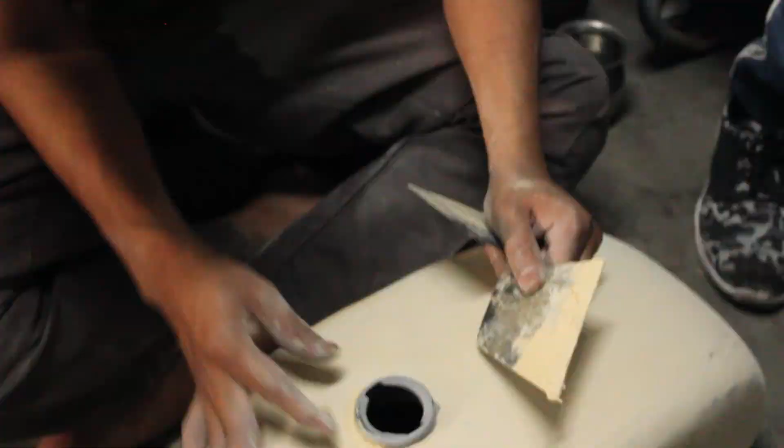Alright, so the paint procedure is not as straightforward as it seems. It actually involves various steps which need to be followed very carefully. Also, this is where most beginners doing a custom build mess their bike up. The paint job is the one thing people notice the most on a motorcycle, and if that isn't done nicely, no matter how cool your design is, your motorcycle will never receive the praise it deserves.

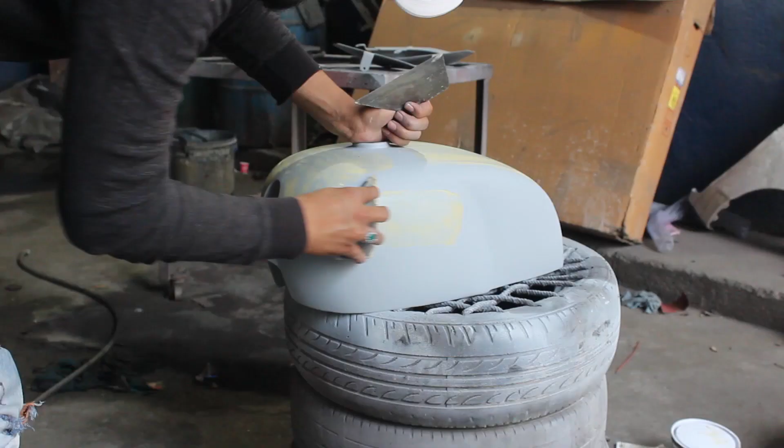So it is better to leave it up to a professional until you understand and master the process, which is exactly what I did as well. So the whole process involves firstly covering up the parts in a primer layer. After this, the part is covered up with putty to fill all the minor gaps and to create a smooth, uniform surface. This step is quite a crucial one because you need to be highly satisfied with the output before painting it up. Also, the edges and curves of the parts need to be kept intact during the whole process.

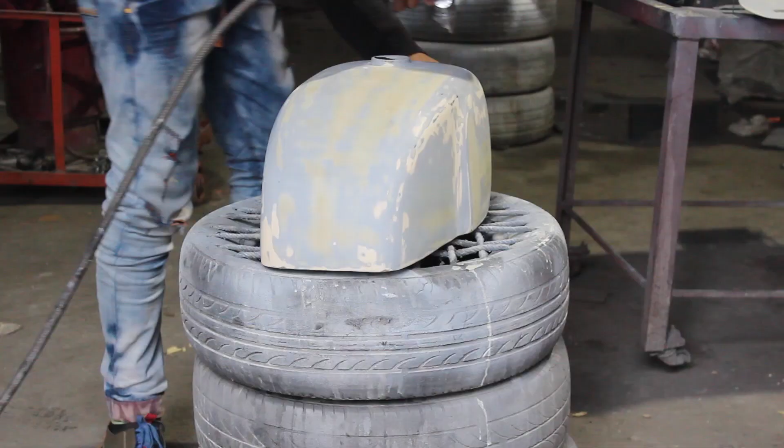Once the putty is complete, another layer of a finer putty called check putty is applied to the surface to fill the very fine pores which might not have leveled out previously. Once we were satisfied with the smoothness of the surface, we sprayed another layer of a better and denser primer on the parts and allowed them to dry overnight.

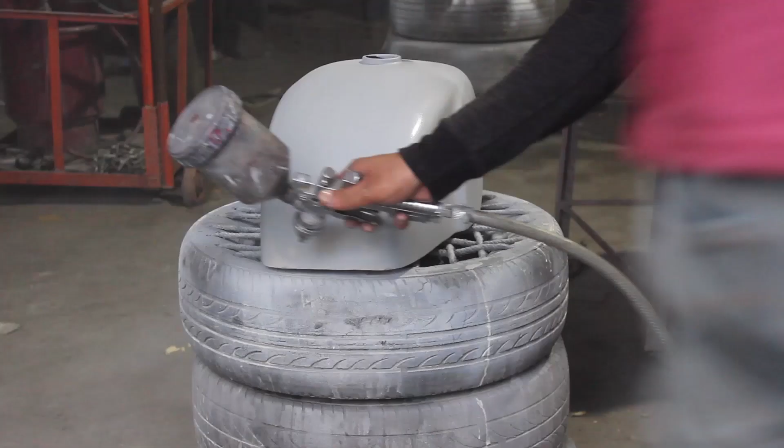And finally, it was time to spray everything with paint. The paint that I used for the tank and the side panels is a shade from Nissan. It's like a very deep shade of red. So when it is exposed directly to the sun, it exhibits a very bright color, and during night time it appears to be almost black. Everything else was sprayed with a plain black color.

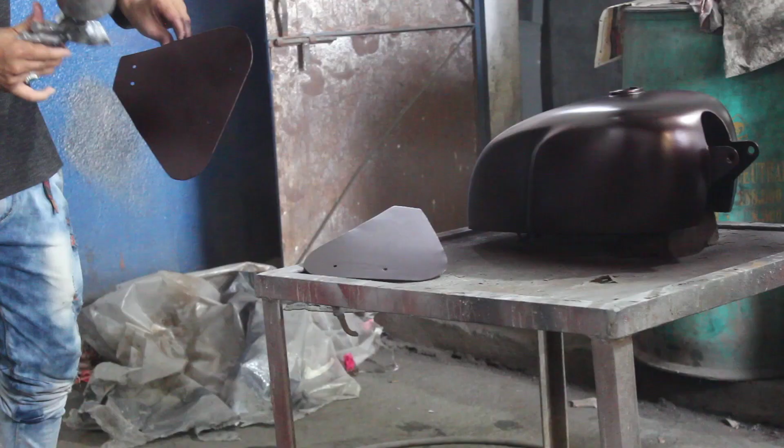Also, if you're planning on using some graphics on your parts, this is the right time to do it. That is right before the clear coat, so that once the clear coat is done over the graphics, they are held nicely in place.

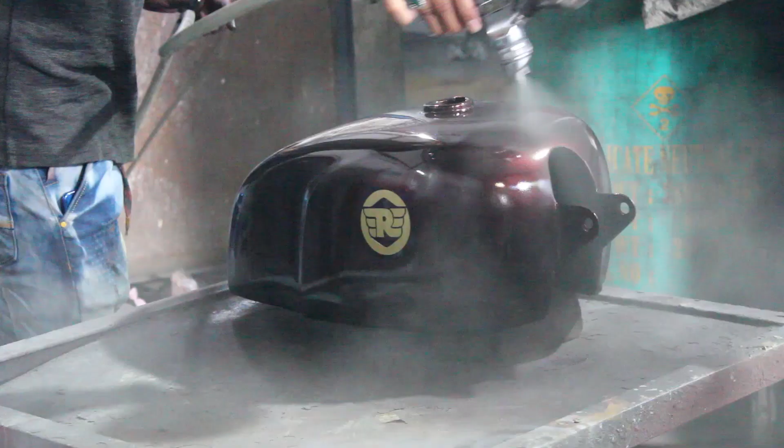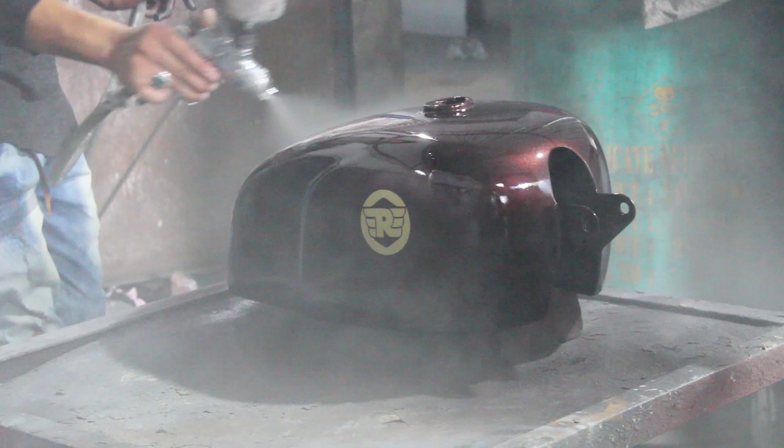And now comes the final step, spraying the parts with a clear coat. This is what your final output is, and trust me, it's just a magical feeling watching the paint get all shiny and pearly after this coat is done. The whole paint job, in my case, turned out to be better than I had expected.

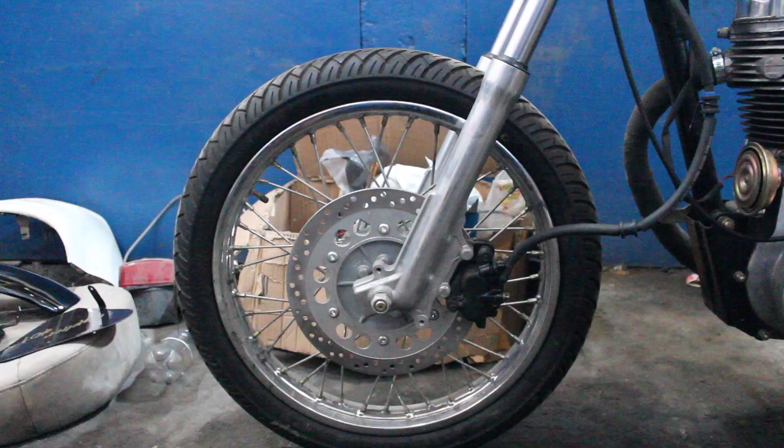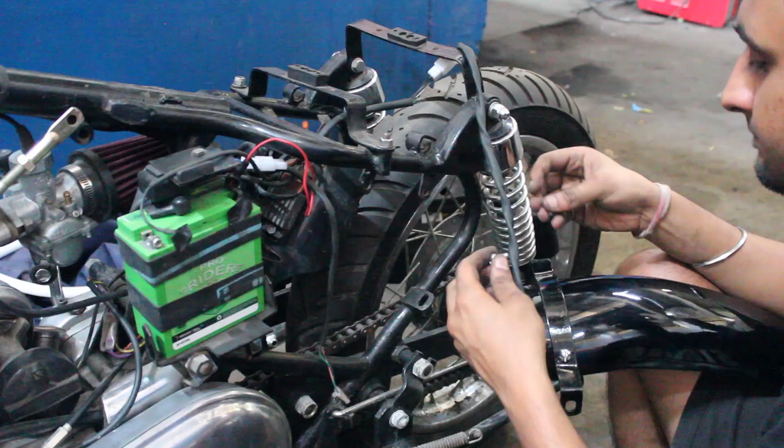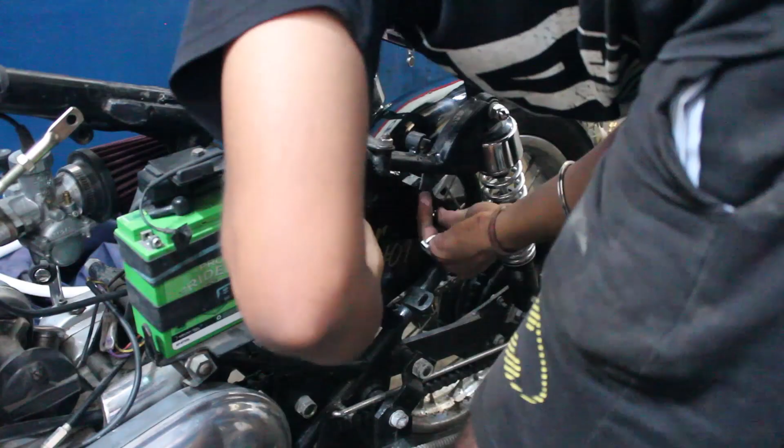So the whole paint process took us 2 days to complete, after which I had to leave town for about 4 to 5 days. So the paint had an ample amount of time to dry up all nicely. And as soon as I returned, I got to assembling the motorcycle, which took me 1 complete day. I started off at 10 in the morning, and at about 8:30 in the evening, I was done with the

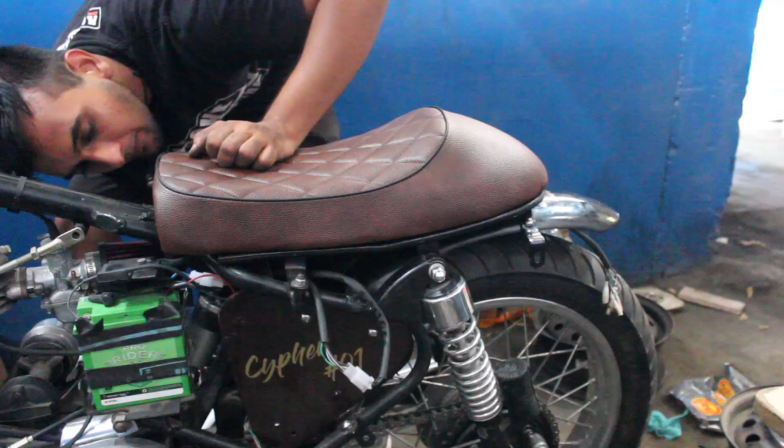whole assembly. So we started off with the front mudguard, then we got to the rear mudguard and the side panels, then the seat subframe, then came in the seat, and finally the tank. Alright, so now everything is done, the project is a success, I got the motorcycle back home.

But in a few days I realized that the exhaust note from this new exhaust was really loud. The motorcycle was grabbing attention, but for all the wrong reasons. So I had to bring down the decibel level of the exhaust. But what are the proper ways to silence down a silencer?

So there are a few measures that you can take to bring your exhaust volume down. Some of which are increasing the glass wool volume in your exhaust, or inserting a baffle in your exhaust, or even reducing the outlet diameter. And in our case, we took all the three measures. So this was the basic structure of our exhaust in stock condition. This is where the bent pipe is connected, and this was the final output of the gases.

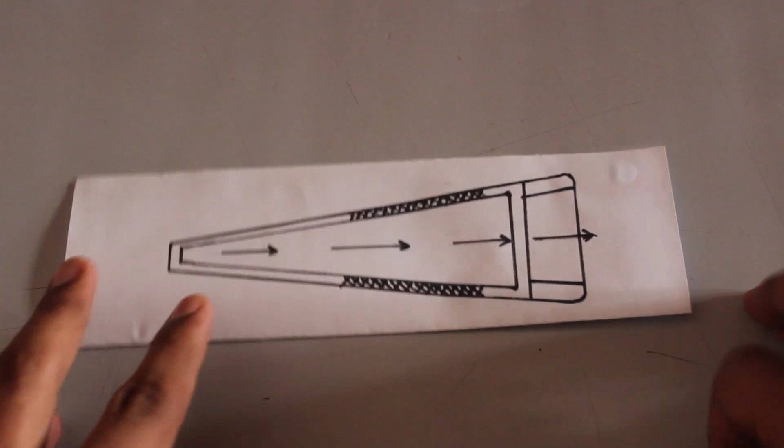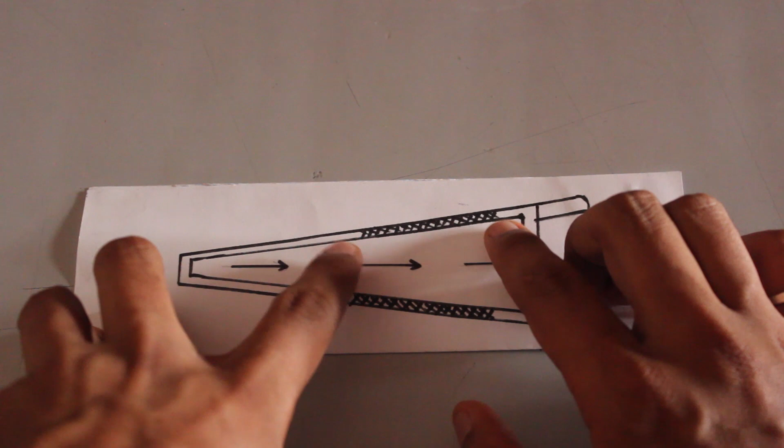So this part of our exhaust is actually a cap that is removable, and so when I removed this cap, I found out that there was a metallic mesh inside the exhaust, and between the exhaust walls and the metallic mesh was some amount of glass wool. When I removed this glass wool, I found out that it was not even going till the end of the exhaust. It was just in a little area, in let's say 1/3 or about a half of the exhaust.

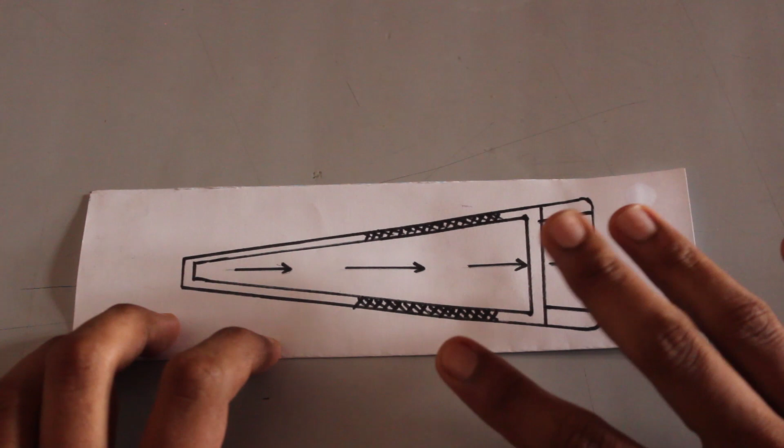So what we did was we removed the old glass wool from the exhaust, and now we wanted to insert baffles into the exhaust. So I tried to source a baffle online, and when I went to Amazon, I got to know that they could deliver a baffle to me, but after a waiting period of 1 month. Maybe the baffle was getting imported from somewhere outside India, but I didn't have that kind of time in my hands, and I couldn't ride the bike as it is up till then, and also I couldn't just not ride the bike at all. So I decided to create a baffle from the older exhaust.

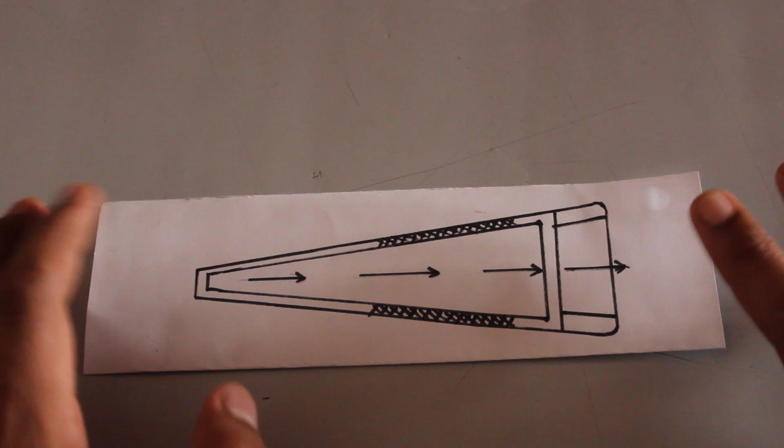So the end pipe of the exhaust is a narrower one, so we cut that off, we sealed it from one end, we drilled holes in its walls, and we welded it on the cap of the newer exhaust. And the final structure that we created for the exhaust was something like this.

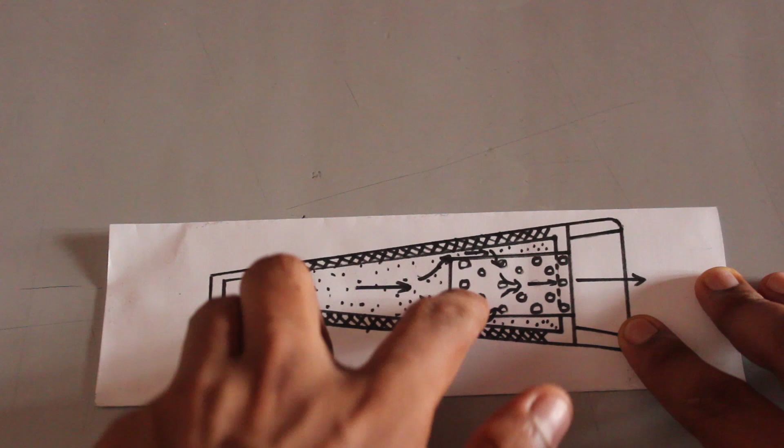So we increased the amount of glass wool between the exhaust walls and the metal mesh up till here, and also we created a baffle from the older exhaust by cutting out its outlet pipe and closing it from this end, drilling a lot of holes in its walls, and then welding it on the outlet cap. This area that you see over here is filled with glass wool as well.

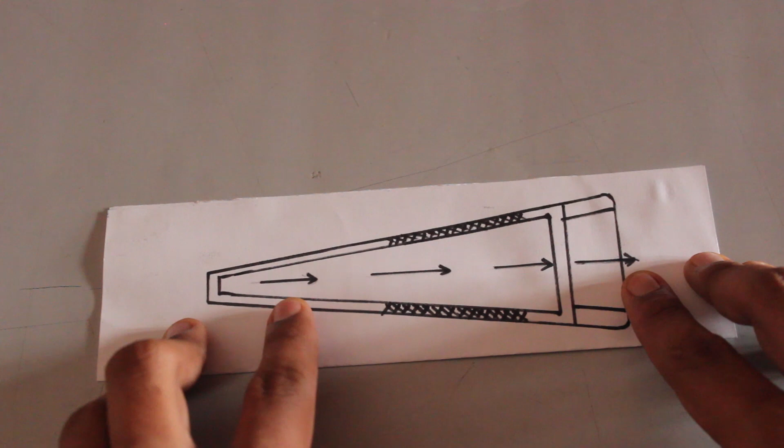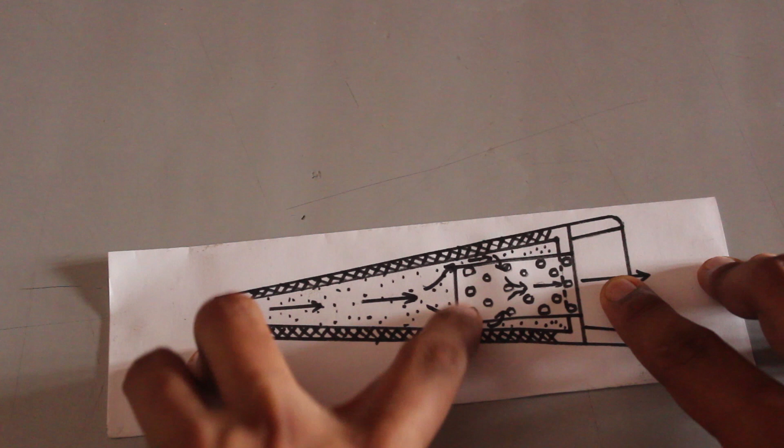So what was happening previously with our exhaust was that the exhaust fumes were not being forced to flow through the glass wool, rather they were free to flow from this area which was totally hollow. But now that we filled glass wool in this area, the exhaust fumes had to come over here, and since this area was closed, they had to go over here, and then they could get inside through the holes, and then they were let out.

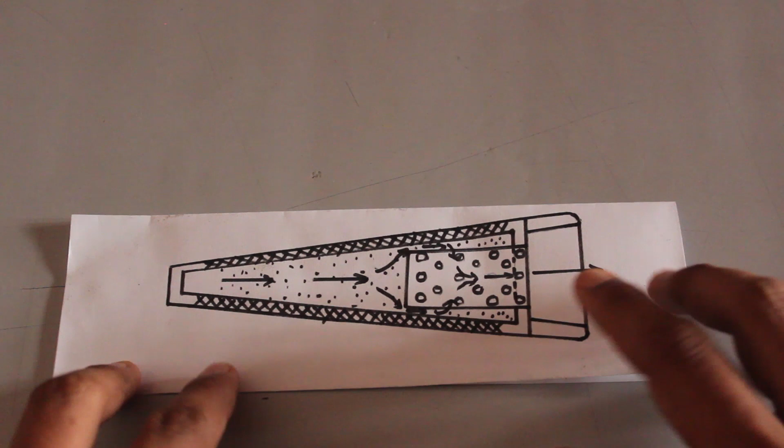This measure reduced about 30% of the exhaust volume, and another 20 to 30% was reduced by reducing the end diameter of the exhaust.